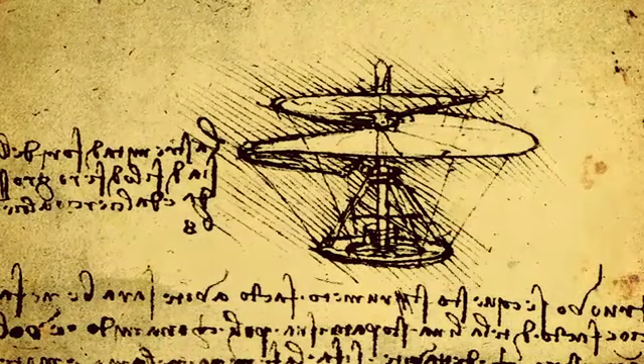In 1783, the Montgolfier brothers were the first to build a hot air balloon that successfully flew. In the 1890s, Otto Lilienthal built gliders, and in 1903, the Wright brothers built the first powered aircraft that was practical. It has been this constant of trying to break the bonds of Earth that has fueled our efforts to engage in flight.

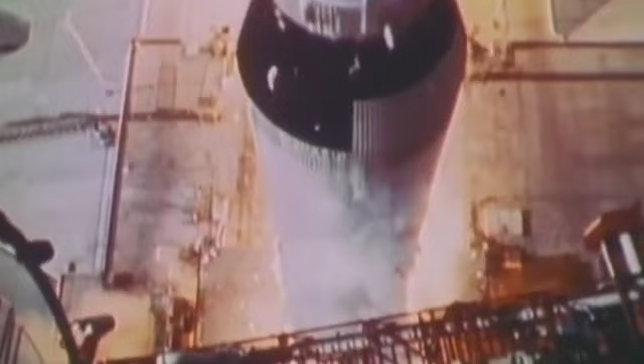From all of those early efforts and all of those early desires, to where we are today, being able to fly around the globe in less than a day, and being able to fly into space to explore the bodies of the solar system. It's a remarkable experience when you think about it, how humanity has moved from where it was to where it is.

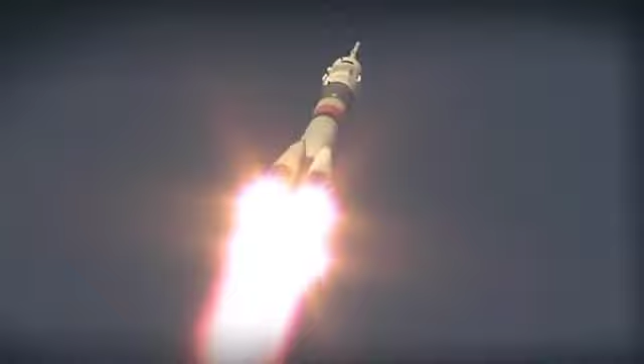On August 29, 2006, in the Patagonia region of Argentina, the adventurer Steve Fossett set out to break yet another world record in aviation, pushing the very boundary of what is possible. His goal? To break the absolute altitude record for an unpowered glider.

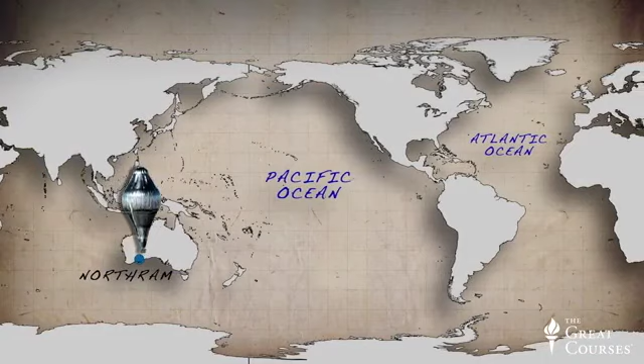Now, Fossett had already had a trophy case full of aviation records, accomplishments, and accolades. Most notably, he was the first person to ever circumnavigate the globe, flying solo, uninterrupted, and without refueling. He actually did this in a balloon between June 19th and July 3rd, 2002, flying in an easterly direction, starting and ending in Australia. And that wouldn't be his last time around the globe either.

Fossett went on to make a total of 5 non-stop circumnavigations of the globe in craft as varied as a sailboat, balloon, and airplane. So clearly, Fossett was an aviation adventurer of the highest order. Now, this wasn't Fossett's first attempt at the glider altitude record either. Over a period of 4 years, he had made 27 attempts at the record, all without success.

The challenge with a glider is that there is no energy source on board to propel the aircraft higher. So Fossett and his co-pilot, Einar Enevoldsen, had to use standing mountain waves to push their glider to increasing heights in an effort to break the altitude record of 49,009 feet set by Robert Harris in 1986.

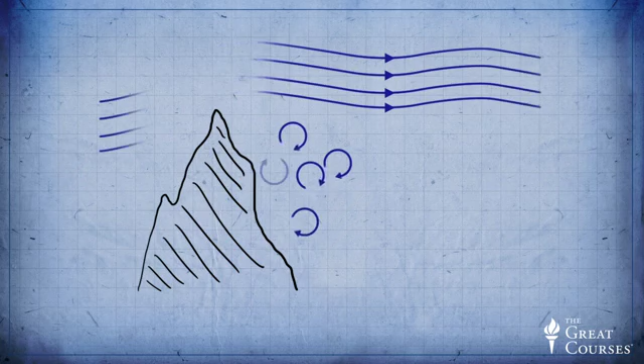Standing mountain waves, or lee waves as they are called, occur when the wind flows over the top of a mountain ridge at a direction close to perpendicular to the ridgeline. Strong periodic regions of updrafts and downdrafts are formed, and the air can sometimes be highly turbulent, called clear air turbulence. In fact, these mountain waves are so strong that they have been known to cause commercial airliners to disintegrate in flight.

It was into this kind of high-energy mountain wave in the Andes that Fossett and Enevoldsen ventured in order to extract enough energy from the winds to take them up to new heights. And they did it. Their glider climbed to an altitude of 50,722 feet, a new world record for altitude in a glider.

This is ultimately a demonstration of humans and nature in a dynamic relationship. The human effort to overcome the limitations of gravity, but also working with nature to extract energy from the winds to stay aloft. And that dynamic really is the science of flight in action.

Flight is what captivates our imagination. Our pursuit of flight is propelled by longings for adventure, freedom, the spirit of discovery, and exploration of the unknown. From the sky, we can see where water has flowed and fascinating geometrical patterns left by human development. Other aspects of life are placed in a larger perspective from the air, where we can transcend national boundaries with ease. Perhaps no image has so transformed our understanding as much as the first photographs taken of the entire Earth as viewed from space.

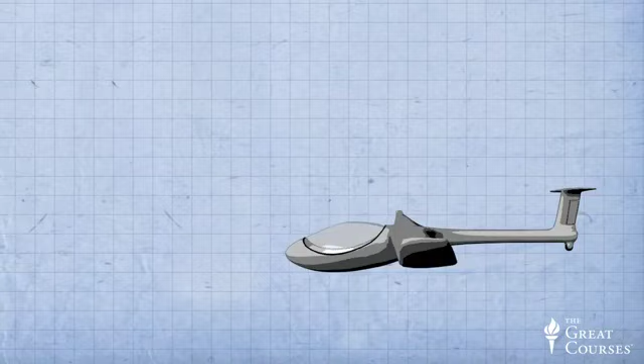Now, when a glider climbs in altitude, what it's doing is increasing its potential energy. But since there's no engine on board to increase the glider's energy, the glider must tap some kind of external energy source. From ground level, this increase in energy might be provided by a tow plane or a ground-based winch, either of which can boost the speed and height of the glider. For a glider already in high-speed flight, a pilot can trade off some of the aircraft's kinetic energy for potential energy by pulling up into a climb. The altitude is higher while the airspeed decreases.

But most commonly, a glider pilot will look for external sources of energy within the atmosphere. Most often, these sources include thermals, which are rising masses of heated air. But at the highest altitudes, glider pilots need to rely on mountain waves, which are very strong periodic updrafts and downdrafts created by wind flowing over the top of a mountain ridgeline. Fossett and Enevoldsen basically surfed on these mountain waves, soaring all the way up to their new record altitude of 50,722 feet.

Sadly, it was the same kind of atmospheric phenomenon, a downdraft this time, that took Steve Fossett's life in a powered aircraft on September 3, 2007, just about a year after he set his glider altitude record. He was flying in a mountainous region of Nevada in a super decathlon, and the crash investigation report from the National Transportation Safety Board, or NTSB, suggests that his aircraft simply couldn't outclimb a downdraft on that hot day and at those high altitudes, where the air is so thin.

So the power of the winds that took him soaring to new record heights in a glider are the same winds that led to Fossett's untimely death in a powered aircraft. It's a stark reminder that we can sometimes harness the wind, but we cannot always master it. There will always be an element of risk and danger, whether in a glider or in a powered aircraft. Pilots are always subject to the constraints and forces of the natural world.

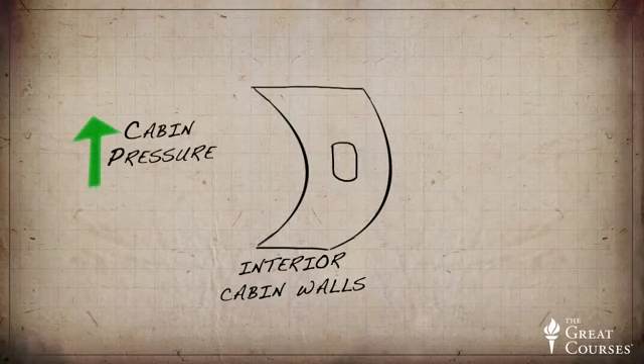The thin air at altitude is why commercial airliners have pressurized cabins, which take compressed air from the jet engines and pump up the pressure in the cabin. But when the cabin pressure is raised to keep you breathing, there is exceptional force placed on the cabin walls due to the pressure difference between the inside and outside of the cabin.

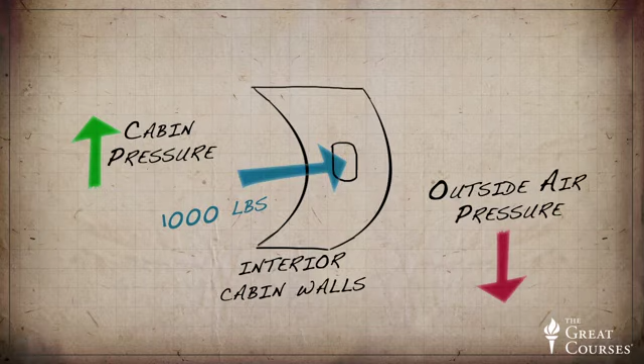The structure of the aircraft fuselage, or main body, has to be built to contain over 1,000 pounds of force acting on every square foot of the cabin wall. If this structure isn't strong enough, the fuselage will pop like a balloon with an explosive depressurization.

Also, the aircraft wing has to somehow provide enough lift to keep the aircraft flying. In the stratosphere, where commercial airliners fly, there's only about 1/3 of the air that we have near the Earth's surface. Since lift generation depends on having a sufficient amount of air to work with, the process of generating lift is so much more difficult at altitude, and it becomes a driver for the size of the wing.

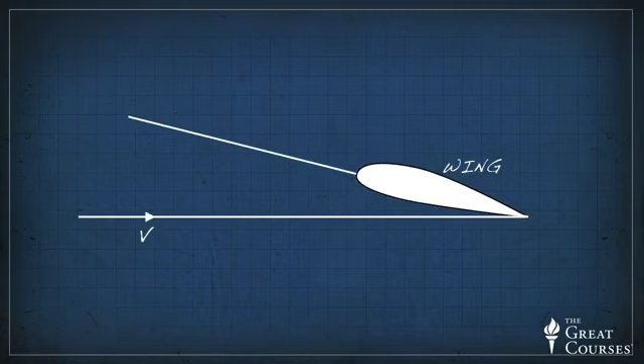And the speed of the aircraft must come into play as well. The faster the aircraft moves, the more air molecules there will be that rush over the wing's surface, and the higher the momentum of that air will be. And finally, the angle of the wing with respect to the oncoming flow has a significant impact on the lift. This angle, called the angle of attack, dictates how much wing area is presented to the flow, affecting how much the airflow is disturbed by the wing's presence.

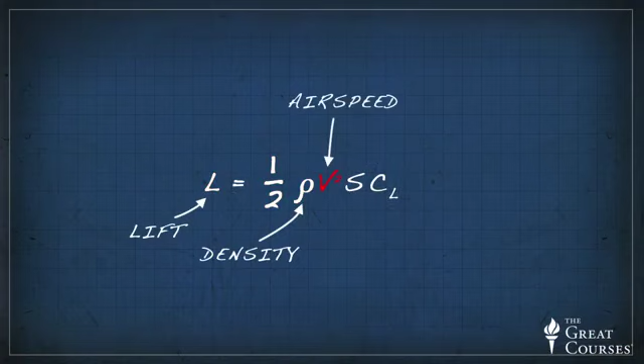Pulling these factors together, we see that the lifting force of an aircraft depends on how many air molecules are present, which is the density of air, the size of the wing, the angle of attack, and the square of the airspeed. There's a straightforward equation to express this fact: the lift must be equal to the product of 1/2 times density times the square of airspeed times wing area times something we call a lift coefficient.

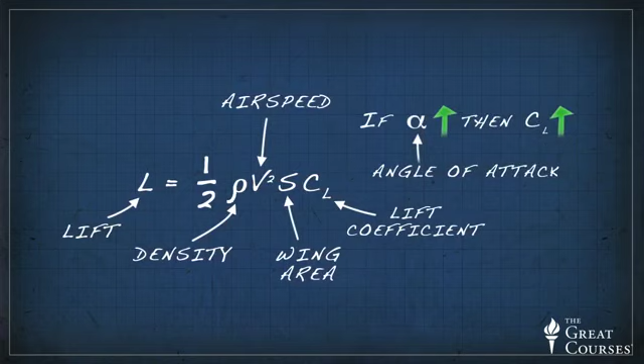The lift coefficient goes up with angle of attack and is a measure of how hard the wing is working to produce lift. And here's a critical point: any aircraft or bird in level flight must have its lift exactly equal to its weight for equilibrium to be maintained. So we can look at a 5-pound bird in flight and immediately recognize that it is producing exactly 5 pounds of lift.

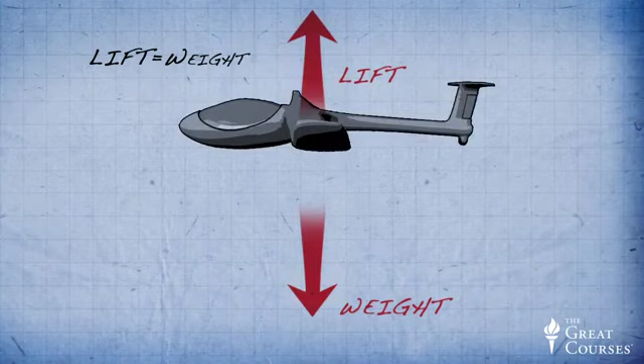But if the bird wants to climb to a higher altitude, it must increase its lift for a short time to pull it up to that higher height. And if it wishes to descend, it must allow its lift to drop below the value of its weight.

The other key aerodynamic force that glider pilots and designers worry about is drag, which acts on the glider against the direction of flight. If it weren't for drag, a glider could soar indefinitely. Drag follows the same trends as lift, since they are both aerodynamic forces. Drag also scales with air density, the square of the airspeed, the wing area, and a drag coefficient. The drag coefficient is a measure of how aerodynamically clean the glider is. The more streamlined and efficient the glider is, the lower its drag coefficient will be.

Now, for gliders, in fact all aircraft, the key metric that defines the efficiency of flight is the ratio of lift to drag: lift divided by drag. Since lift is desirable, but drag works against us, we can think of L over D as an efficiency metric. We want it to be as high as possible. For a glider, the distance that it can fly, if no further beneficial winds are encountered, is related to this lift-to-drag ratio. Let's see how that works.

First, we'll define a glide path angle, which is the angle of the flight path referenced to a horizontal plane. Glide path angle uses measurements of the altitude and horizontal distance to determine where an airplane is expected to touch down based on its current trajectory. In other words, the glide path angle helps predict the spot where the airplane will land.

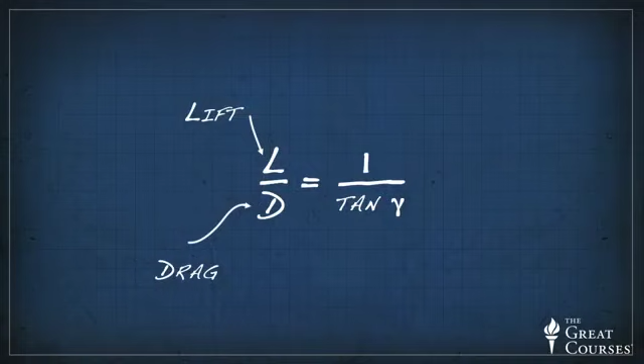Now there is a very important relationship between the lift-to-drag ratio and the glide path angle. This relationship is given by a simple but profound equation where lift-to-drag ratio is equal to the inverse of the tangent of the glide path angle. This is a compelling relationship that describes the glide performance of an aircraft.

First, we have to take a look at the tangent of the glide path angle, gamma. Now, from trigonometry, the tangent function may be familiar as the ratio of the length of the side opposite of the angle to the length of the side adjacent to the angle. But the key thing to recognize here is that if the angle gamma is large, then the tangent of gamma is also large. The glide path angle is important because it directly dictates how far we can glide.

The glide path angle dictates the magnitude of our aircraft's horizontal glide distance relative to our height above the ground. The smaller the glide angle is, the longer our glide range becomes. So in order to get the best glide performance, we want to minimize the glide path angle. And to do this, we need to maximize the lift-to-drag ratio. In other words, we want more lift and less drag.

Glider pilots such as Steve Fossett know that they have to minimize their glide path angle to glide as far as possible, and that can only be done by flying the aircraft at its most efficient operating condition, where maximum lift-to-drag ratio is achieved. But how did he do this?

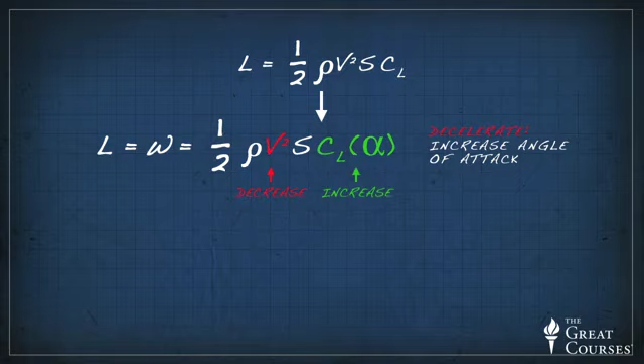So a pilot can slow an aircraft down by increasing the angle of attack. Or to accelerate, the angle of attack must be decreased.

Now, even though lift is roughly constant across a range of steady flight speeds, the aerodynamic drag is not constant. For every airplane, there is actually a speed at which the drag will be minimized. At both lower and higher airspeeds, the drag will go up.

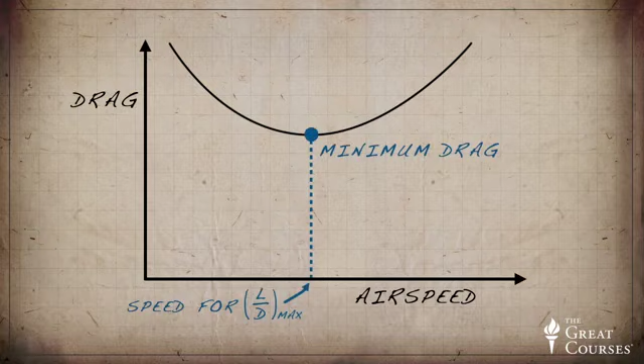So there's an airspeed for minimum drag. With constant lift, this then means that the airspeed for minimum drag is the same as the airspeed for maximum lift-to-drag ratio. And the condition for L over D max also minimizes the glide path angle, which will extend a glide as far as possible.

So a pilot in a glide should fly at the airspeed for L over D max by controlling the aircraft's angle of attack. This is exactly what Captain Chesley Sullenberger did on his ill-fated Airbus A320 that he had to bring to an emergency landing on the Hudson River.

On a cold January morning in 2009, U.S. Airways Flight 1549 took off from New York's LaGuardia Airport. As the flight gained altitude over the city, disaster struck. A flock of Canadian geese flew directly into the path of the plane's engines, and suddenly the aircraft was without power. This event turned the sleek, powerful A320 into nothing more than a glider.

From a peak altitude of only 3,100 feet, Sullenberger's options for a safe landing were few. Thankfully, Captain Sullenberger was a highly experienced pilot with a lot of glider piloting experience as well. As he was looking for a suitable place to land, he perfectly flew the A320's best glide speed of just under 200 knots, or 230 miles per hour, by pitching the aircraft to the right angle of attack to get that speed.

He could have tried returning to LaGuardia, and he considered diverting to nearby Teterboro, New Jersey. But neither option was a good one, since the glide distance of the A320 was only marginally sufficient to get him safely to either runway, and there was the dense New York metropolitan environment in between.

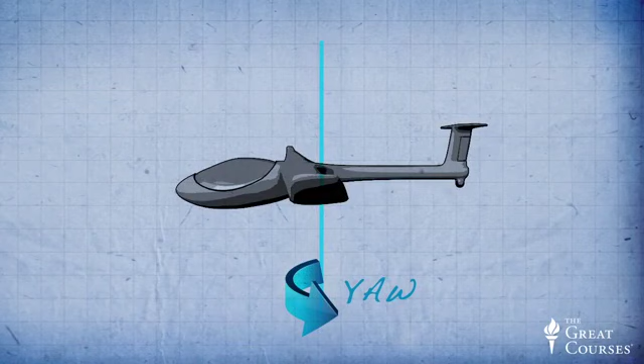Roll is a more extreme version of the tipping side to side that is familiar to a bicycle and motorcycle rider. On aircraft, roll is a rotation about the longitudinal axis, passing down the length of the fuselage, which banks the wings upward or downward to the left or right.

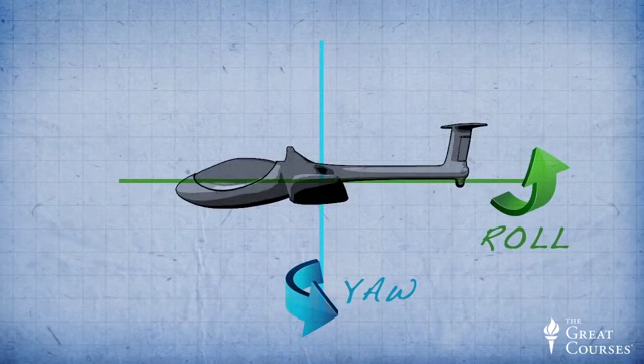And pitch is the dimension unique to aircraft, which is rotation about an axis passing through the wings, which points the nose up or down.

Surprisingly, the method of control input hasn't changed very much over the past century of flight. The Wright Flyer had a control harness and a series of cables to translate the motion of the pilot's shifting body into a patented warping or twisting of the entire wing, which would roll the aircraft to the left or the right. But this technique was cumbersome and not very comfortable.

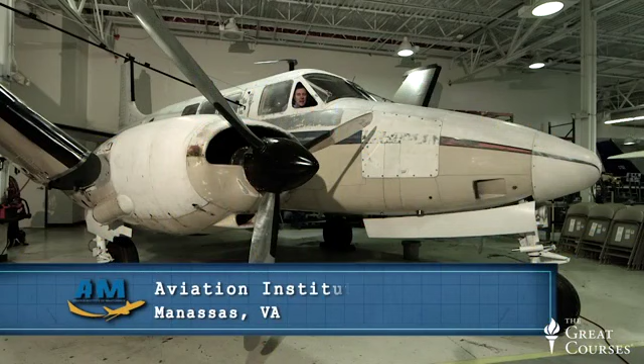We're at the Aviation Institute of Maintenance in Manassas, Virginia. I'm sitting in a Beech Queen Air, and we're going to take a look at the flight instruments and how they're put together.

These are the six-pack of instruments here. We've got the airspeed indicator, attitude indicator, altimeter, vertical speed, the heading indicator, and the turn coordinator.

For the controls, I've got the control stick here for the roll control, pitching down and up. And I've got the rudder pedals here to yaw the aircraft left or right.

If I'm coming in for a landing, I've got my flap switch here, which I can deflect to deploy the flaps. And I've got a landing gear switch here to put the gear down. And here's the gear indication lights for gear down or gear up, for a light for all three.

Here's the throttle quadrant, where I've got the engine RPM, the pitch of the propeller, and the mixture. And then below that, I've got the trim controls, one for each axis of the aircraft: pitch, roll, and yaw. These are the main controls that the pilot will manipulate to keep the aircraft flying.

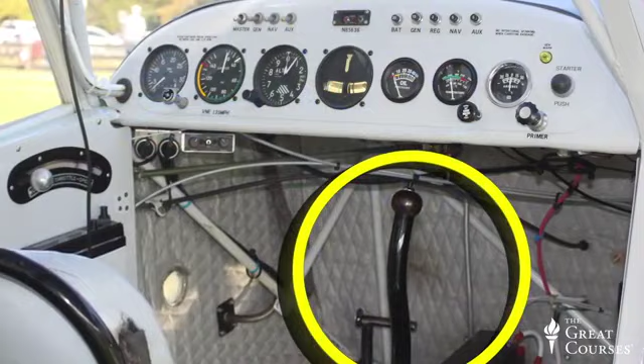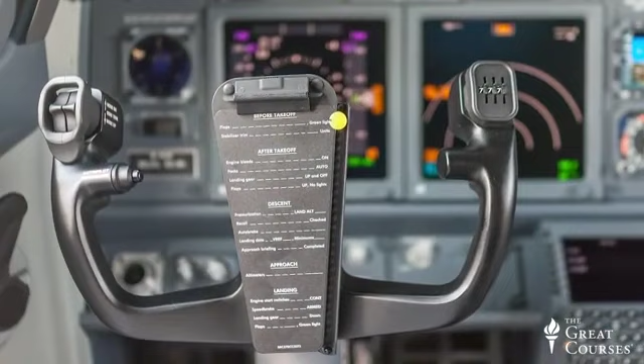Nearly every modern aircraft will have a control stick or control yoke and rudder pedals. The control stick can be a side stick, such as on Airbus or Cirrus aircraft, or between the legs, such as on many fighter aircraft. Most common on general aviation aircraft and Boeing's commercial airliners is the control yoke, which is mounted on a column like a steering wheel that can be pushed forward and back, as well as turned left or right.

And these controls are always connected to three kinds of control surfaces: ailerons on the wingtips for roll, the elevator on the horizontal tail for pitch up and down, and the rudder on the vertical tail for left-right yaw. Each of these control surfaces is like a flap that changes the shape of the wing or tail to produce more or less aerodynamic force in a desired direction.

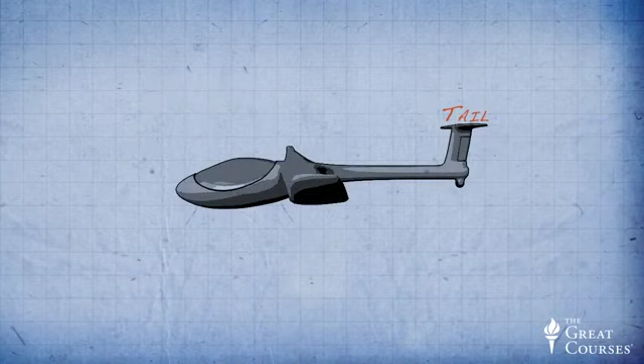The tail of the aircraft is also there to keep the aircraft flying straight in stable flight, where the aircraft must return to an equilibrium condition after it's been perturbed by a wind gust, for example. The horizontal and vertical tails on an airplane come from the same idea as the feathers on an arrow. They work by providing the necessary aerodynamic force to point the nose back towards the direction of flight after a perturbation.

Have you ever thought about what you would do if you were in an airplane with a disabled pilot? Hopefully you wouldn't panic, because that's the worst possible thing you can do. If you're lucky to be on a Cirrus airplane, you have a parachute for the entire aircraft. All you have to do is pull the ripcord for the parachute. Pulling this will deploy the parachute for the entire airplane and take you down for safety.

But if you're not in a Cirrus, what can you do? Well, you can fly the airplane. Let's talk through how that is, and it's not that difficult. The main controls are the throttle and the control stick. The throttle you can push forward to throttle the engine up to higher RPM to accelerate or climb, or you can pull back to descend or slow down.

The control stick allows you to control the attitude of the aircraft: pitch, roll, and yaw. Pitch is controlled by pushing the stick in and out. Pushing the stick forward pitches the elevator such that the nose will point down. If you pull back on the control stick, the elevator deflects upward, creating a downforce on the tail, which pitches the nose upward.

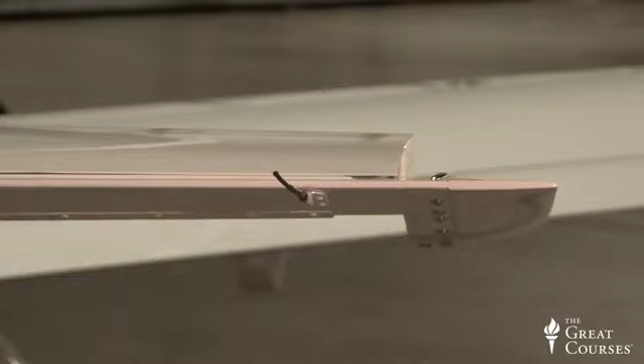Similarly, the roll control is by turning the stick to the right or to the left. If I turn the stick to the left, the left aileron will deflect upwards and the right aileron will deflect downwards, and that creates a rolling moment to turn the aircraft to the left.

Finally, to control the yaw of the airplane, I have rudder pedals at my feet. I can step on the left rudder pedal to deflect the rudder to the left, and it'll turn the nose to the left. Or to the right, I can push the right rudder pedal. Those are also useful for steering the airplane on the ground because they're also linked to the landing gear on the nose wheel. Those are the controls on the airplane.

The plane will basically fly by itself. If it's trimmed up in flight, you really don't have to do a whole lot. But if you need to take it in for a landing, this is the way you can do it.

Now, like the earliest pilots and aerospace engineers, let's pause to wonder about the flight of birds, as well as aircraft. Clearly, there are vast differences in scale between a bird, such as a kestrel at half a pound weight, and a commercial airliner, such as an Airbus A380 at 1.2 million pounds, and vastly different cruise speeds, 22 miles per hour for the kestrel compared to 561 miles per hour for the A380. Are both really governed by the same physics?

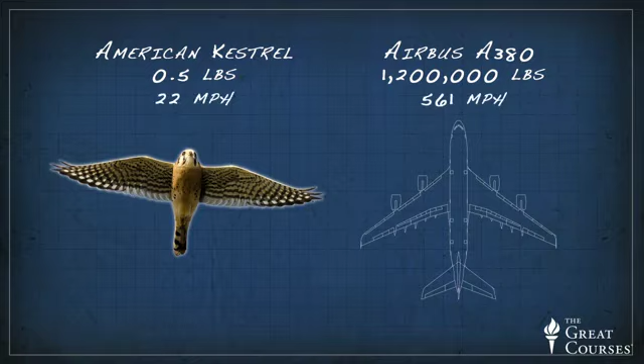A useful metric for comparing these disparate flying bodies is called wing loading, which is an expression for how much load the wing is carrying. It's simply the weight divided by the wing area, which has the same units as pressure. It's not unlike the difference in loading on a floor for high-heeled shoes instead of flats. The high-heeled shoes have a much smaller contact area with the floor, which concentrates the same amount of load over a smaller area. In the same way, an aircraft with a smaller wing will have higher wing loading.

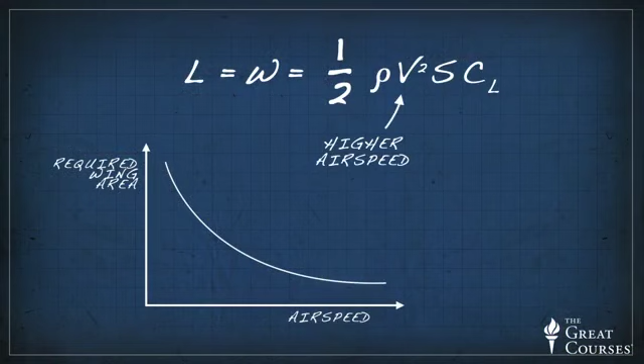Now, wing loading is connected to speed. The faster an aircraft travels, the more the lifting power is shifted from the wing area to airspeed. Since lift remains equal to weight, faster aircraft can have smaller wing areas, which drives up the wing loading.

And it turns out that there is a large variation in wing loading for different flying birds and aircraft. For example, the kestrel, flying at 22 miles per hour, has a weight of only half a pound and a wing area of 0.76 square feet, giving a wing loading of about 0.6 pounds per square foot. The much larger wandering albatross, which cruises at up to 43 miles an hour with a weight of about 20 pounds and a wing area of 6.7 square feet, gives a wing loading of about 3 pounds per square foot.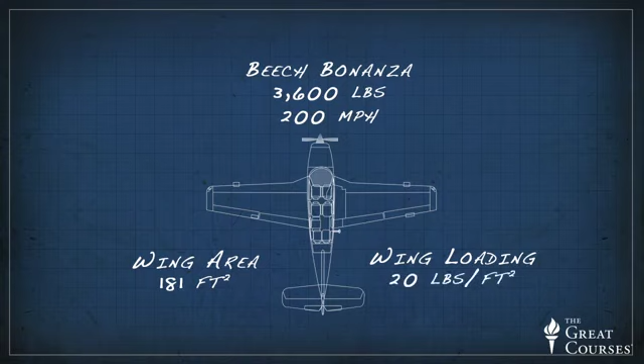Then, let's take things up another notch. A popular light aircraft is the Beech Bonanza, which weighs 3,600 pounds and cruises at about 200 miles per hour. With a wing area of 181 square feet, the Bonanza has a wing loading of around 20 pounds per square foot. And finally, the mighty Airbus A380-800 has a wing area of 9,100 square feet, a maximum takeoff weight of 1.268 million pounds, and a cruise speed of 561 miles per hour. These specs give a wing loading of 139 pounds per square foot.

So we're curious to see the implications of wing loading on flight. Let's take our lift equation and manipulate it slightly to reveal a stunning relationship that governs all flight. First, there's a fundamental to all of flight that is really important to establish at the outset.

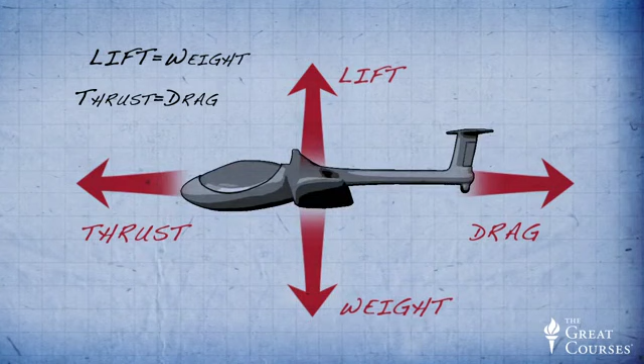In equilibrium flight, whether it's a small bird or the largest commercial airliner, the forces must balance out in equilibrium. So for an aircraft in steady level flight, the lift must exactly equal the weight, and the thrust must be exactly equal to the drag. If these forces aren't in equilibrium, then the aircraft will be climbing or descending, accelerating or decelerating. So the forces must be in equilibrium for steady flight. Pilots and designers refer to this balanced condition as trim, or being in trim.

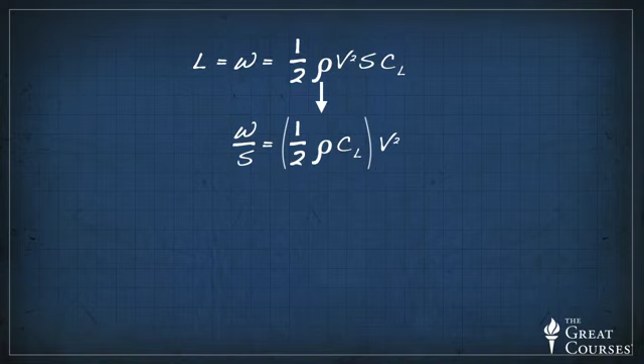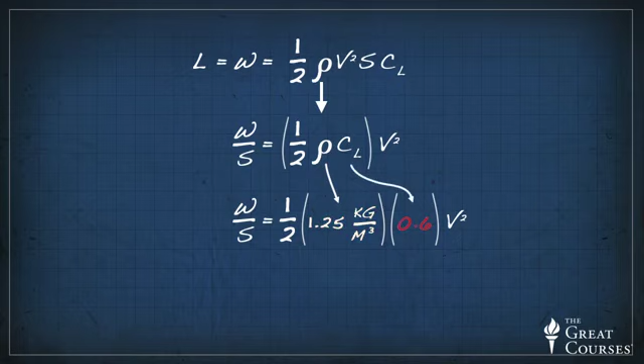Since the lift must be equal to weight, we can substitute that fact into the lift equation and rewrite it as a function of wing loading. If we make some simplifying assumptions and pick a value of air density of 1.25 kilograms per cubic meter, close to sea level density, and a typical lift coefficient of 0.6, we see that wing loading equals a constant times the square of airspeed.

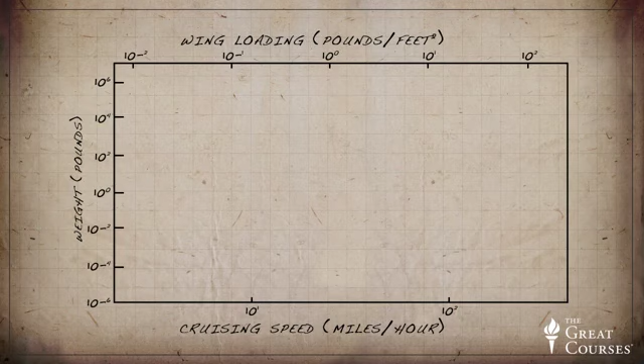Now let's create a plot of the data for each flyer's weight as a function of airspeed and wing loading over a very wide range. This is termed the Great Flight Diagram, first put forward by Henk Tennekes in his book, The Simple Science of Flight. Let's plot data for our Kestrel, the Albatross, the Bonanza, and the A380, each with increasing weight, airspeed, and wing loading.

We can add data from numerous other flyers to the diagram. We see that nearly all of the data collapses along one trend line across a range of 12 orders of magnitude in weight, 4 orders of magnitude in wing loading, and 2 orders of magnitude in airspeed. It's an absolutely stunning portrayal of the commonality of the physics of flight across a vast range of flyers. That leaves us with a simple relationship between wing loading and airspeed, which works over a very wide range.

At flight speeds above that of the A380, some interesting additional physics come into play as we approach the speed of sound. Air is compressible. Air slamming into a fast-moving aircraft bunches up near the leading edges because it can't move out of the way of the oncoming aircraft fast enough. The Mach number, defined as the ratio of flight speed to the speed of sound, is a useful parameter to determine when the flow becomes compressible.

The Mach number of the Kestrel is about 0.03, an extremely low Mach number where there are no compressibility effects. But the A380 cruises at a Mach of 0.85, where Mach effects become significant and begin to alter the aerodynamics. And if Mach number goes above 1, then flight is supersonic, and unique features such as shockwaves begin to form.